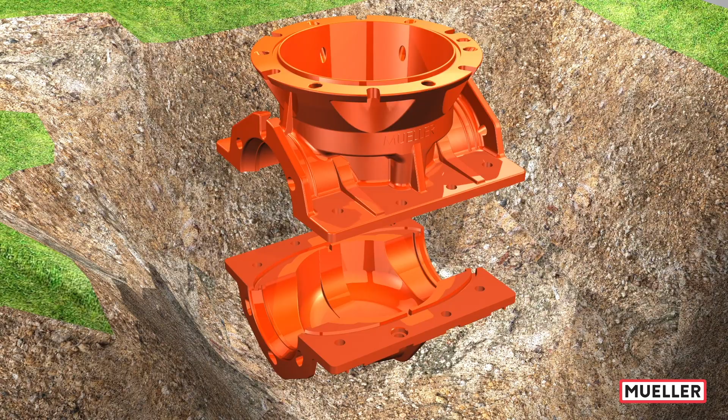Mounting the valve casing on the water main. Lower the top and bottom casings into the ditch, mount the bottom casing on the pipe, and place proper support under the bottom case.

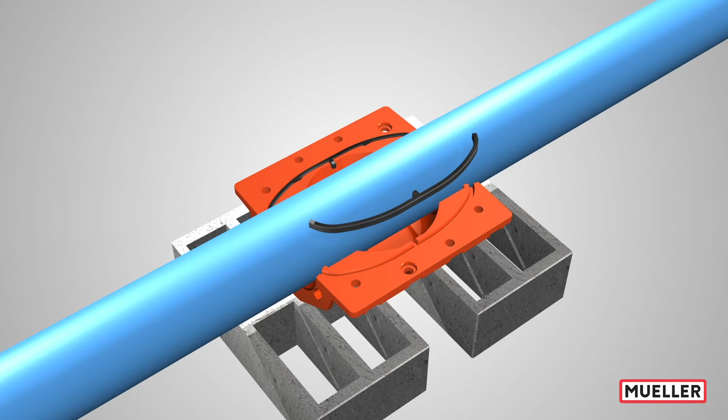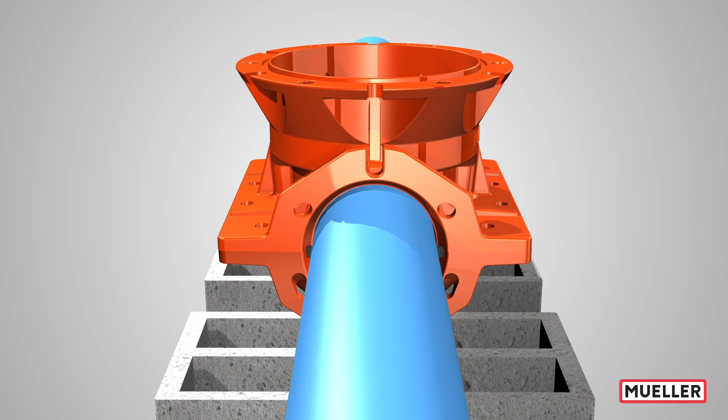Insert the side gaskets into the bottom casing. Insert the alignment bushings into the counter bores of the bottom case. Place and align the top casing onto the bottom casing, then fasten the two sleeves together.

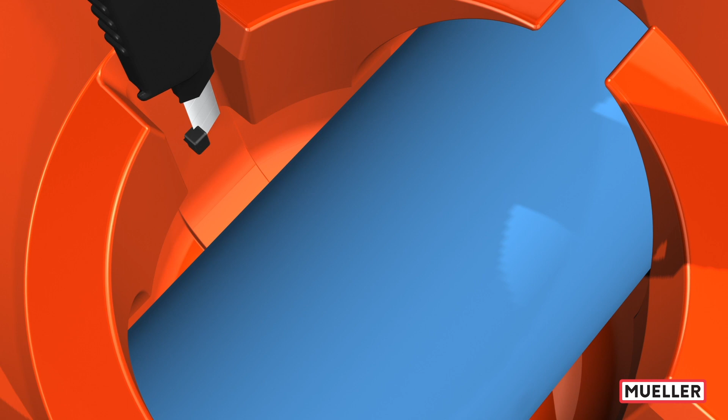Trim protruding side gasket ends at the mechanical joint and valve body sealing surfaces. Install the split mechanical joint gaskets and glands on both ends of the sleeve.

Insert the O-ring into the groove on the top casing and thread the angular bolts into the top casing until they are flush with the inside wall.

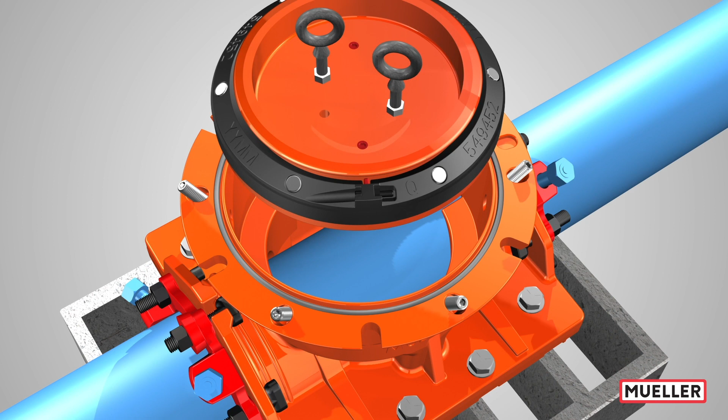Pressure testing the casing assembly. Position the pressure test plate assembly into the top casing assembly. Tighten the angular bolts into the test plate to the product's torque values.

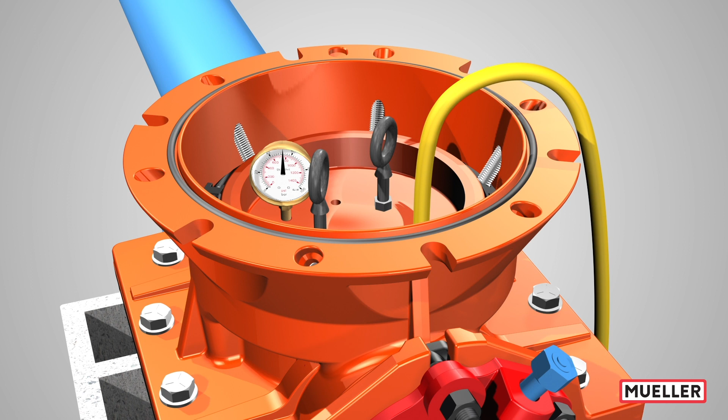Conduct a water pressure test to established pressure and time criteria using the ports provided on the test plate. The mechanical gland gripper nuts may be twisted off at this time.

Back out the angular bolts until they are flush with the inside wall. Remove the O-ring and test plate. Remove the angular bolts. Make sure that the top casing is covered to prevent debris from entering the product.

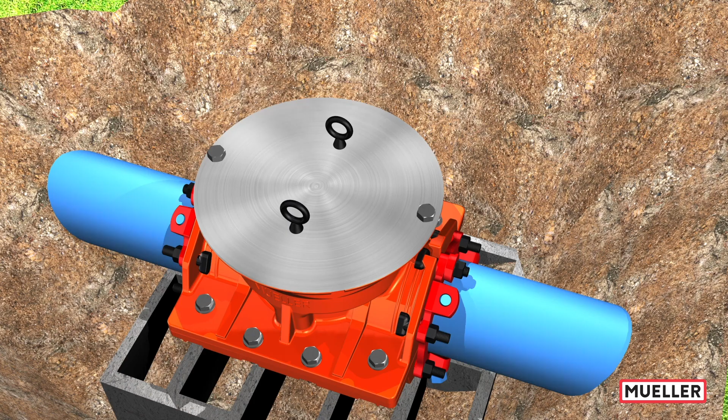Pour concrete footer up to the casing flanges.

Preparing for the cut. Thread the angular bolts into the top casing. Place O-ring into the groove of top casing.

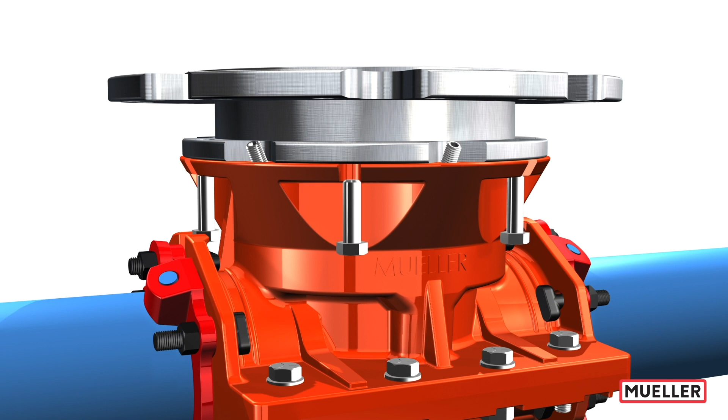Install and align the bottom adapter onto the top casing flange. Close the fasteners oriented with the nut on top of the flange.

Place the O-ring into the gland on top surface of the bottom adapter. Install the knife valve seat side up onto the bottom adapter.

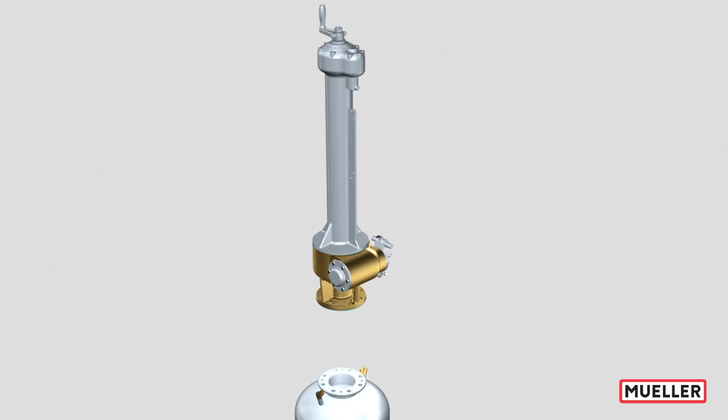Assemble the drilling machine onto the short adapter. Assemble the shell cutter and pilot drill assembly to the cutter hub.

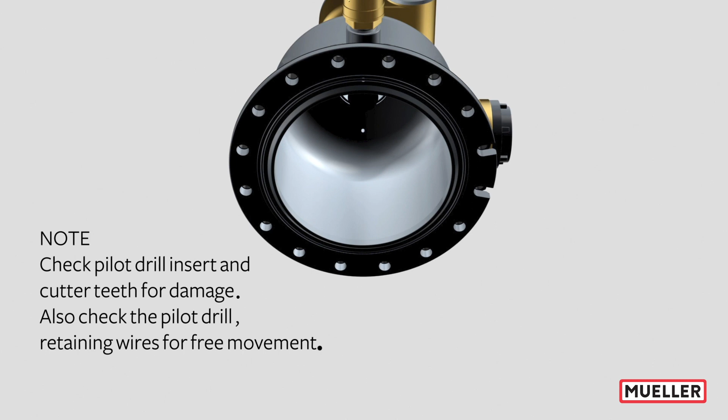Check pilot drill insert and cutter teeth for damage. Also check the pilot drill retaining wires for free movement.

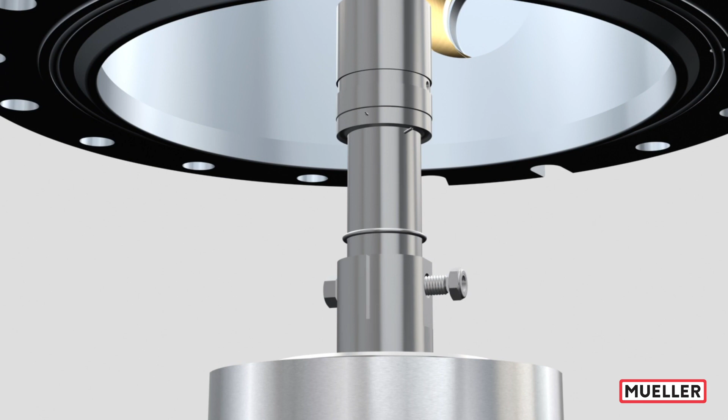Advance the boring bar to attach the cutter assembly, then retract all the way back into the short adapter.

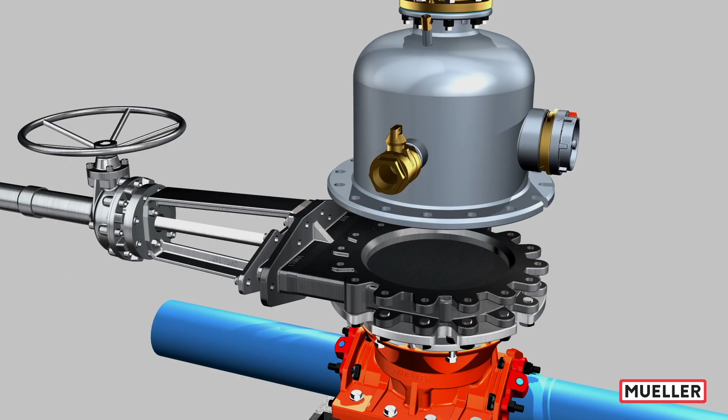Place the O-ring into the gland in the underside of the short adapter. Install the short adapter onto the knife gate.

Open the 1/4-inch air bleed valve on top of the short adapter. Fully open the knife valve.

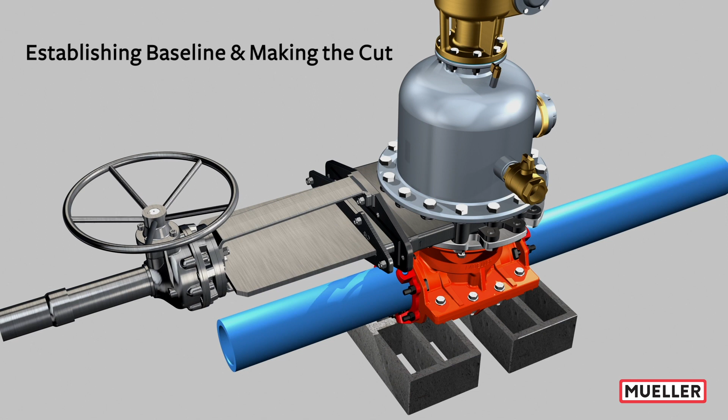Establishing baseline and making the cut. Lower the cutter until the pilot drill contacts the surface of the main.

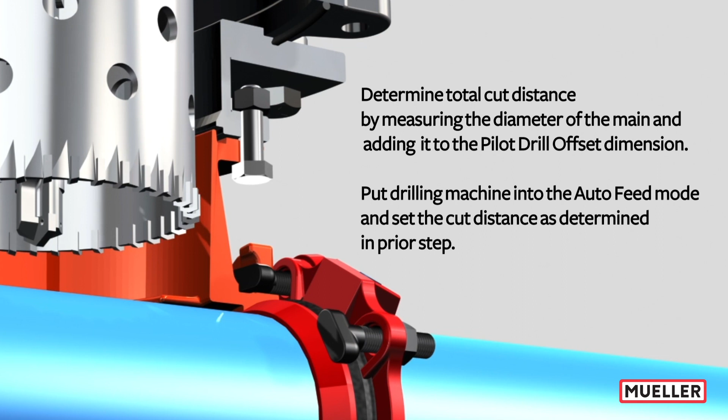Retract cutter 1 full turn of the drilling machine's manual crank rotation. Determine total cut distance by measuring the diameter of the main and adding it to the pilot drill offset dimension.

Put drilling machine into the auto feed mode and set the cut distance as determined in the prior step.

Begin the cut. Once fully vented and water escapes, close the 1/4-inch air bleed ball valve on top of the short adapter. Once the cut distance has been achieved, stop the drilling machine.

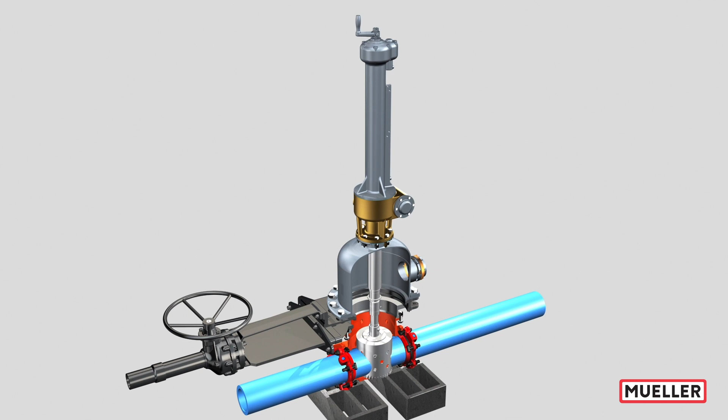Fully retract cutter into the short adapter. Close the knife valve. Open the 2-inch drain valve on the short adapter to depressurize and drain the water.

Prior to assembly, visual identification of the removed section of main pipe by the cutter assembly can be made through the 4-inch Storz inspection port.

Disassemble the short adapter drilling machine assembly from the knife valve.

Evacuating the chips. Insert the chip evacuation rod through the chip evacuation plate, then attach the retainer nut to the end of the rod.

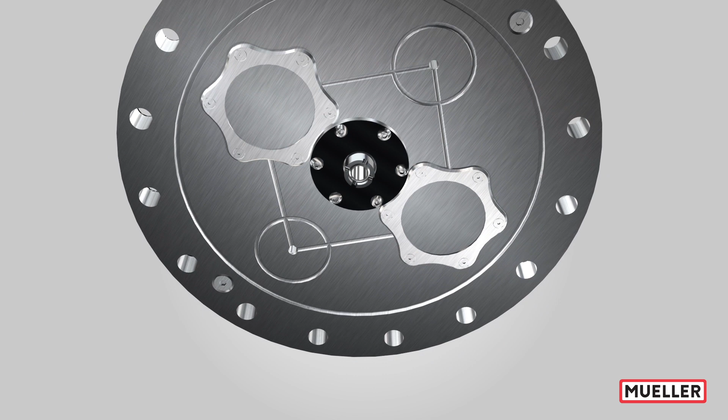Insert the O-ring in the gland of the chip evacuation plate. Attach the chip evacuation plate assembly to the knife valve.

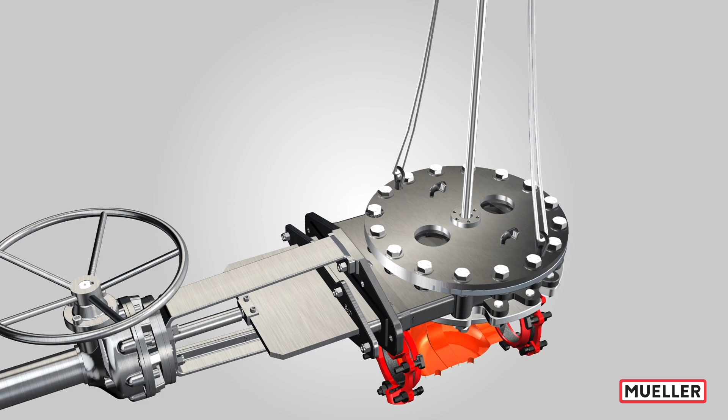Fully open the knife valve, vent the air, and push the probe to the bottom of the casing assembly. Open the release valve to begin the flushing process.

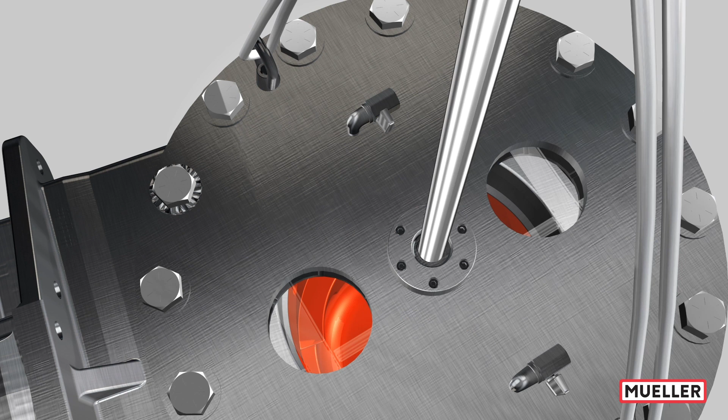In sweeping motions, move the rod across the floor of the casing assembly, flushing chips. View progress through the sight glass of chip evacuation plate. Continue until the floor of bottom casing is free of chips.

Once clean, fully retract the chip evacuation probe upward and close the knife valve. Disassemble the chip evacuation plate from the knife valve.

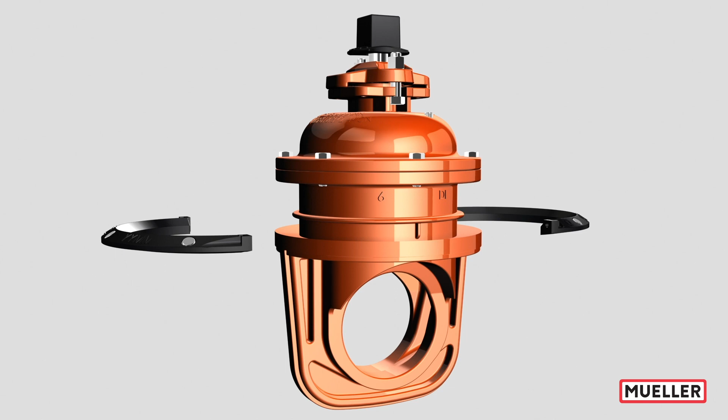Inserting valve body assembly. Assemble the valve packing ring onto the valve body and gasket. Remove the valve operating wrench nut.

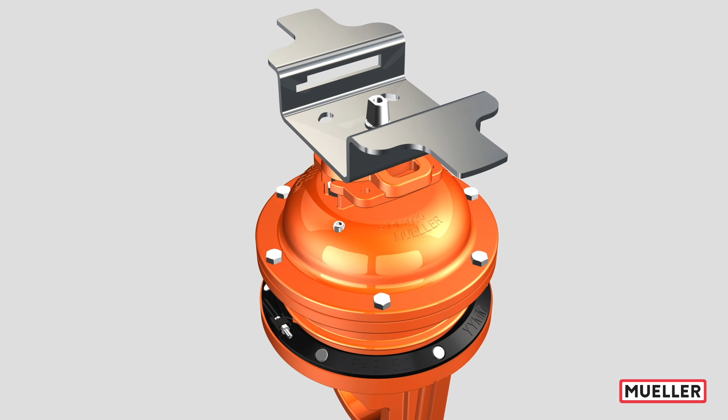Assemble the guide bracket assembly to the valve bonnet using shoulder bolts, with the valve guide perpendicular to the waterway. Stage the valve body and bracket assembly onto the long adapter.

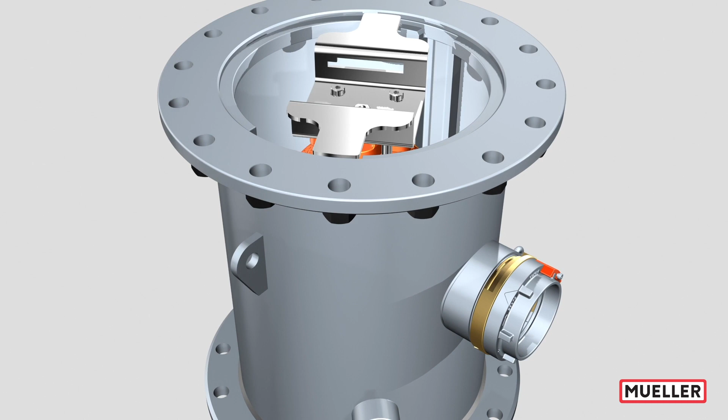Insert the O-ring in the underside gland of the long adapter. Assemble the long adapter with the valve in it to the knife valve.

Fully retract the boring bar and remove the shell cutter assembly. Attach the valve locking rod to the machine boring bar.

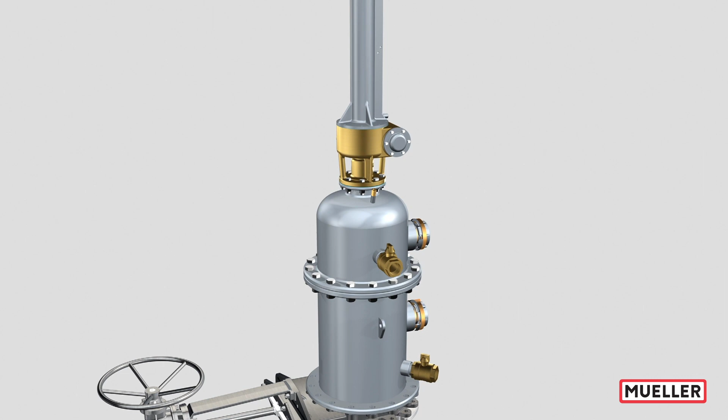Assemble the short adapter drilling machine assembly onto the long adapter. The locking rod must be centered to fit between the slots of the valve guide bracket.

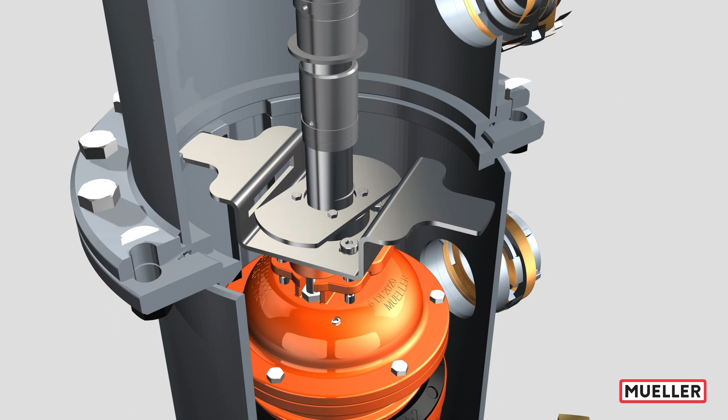Manually lower the locking rod until it touches the valve guide assembly. Rotate the locking rod by 90 degrees to engage with the valve guide assembly bracket.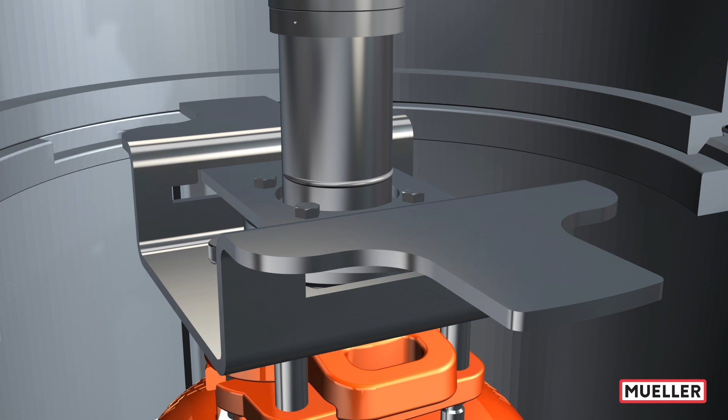Then lift the valve body assembly up off the staged position. Rotate into alignment with the valve guide tracks of long adapter.

Prior to opening the knife valve, the 4-inch Storz inspection port on the short adapter can be used for visual verification of this step being completed correctly.

Verify the 2-inch drain valves and 4-inch Storz inspection ports on both adapters are closed tight. Open the 1/4-inch air bleed valve on top of the short adapter.

Fully open the knife valve. Once fully vented, close the 1/4-inch air bleed ball valve on top of the short adapter.

Manually lower the valve body assembly until fully seated, compressing the valve body seal. Advance the angular bolts into the packing rings to the correct torque values.

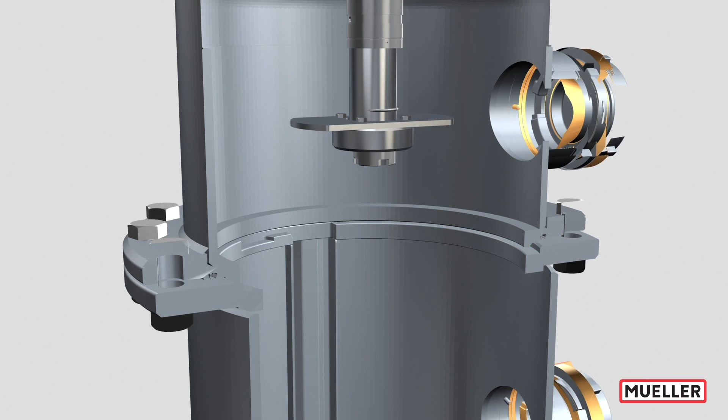Rotate locking rod by 90 degrees to disengage from the valve guide assembly bracket, then retract fully into the short adapter.

Caution: do not attempt to close the knife valve at this time. Open the 2-inch drain valves on the short and long adapters to depressurize and drain the water.

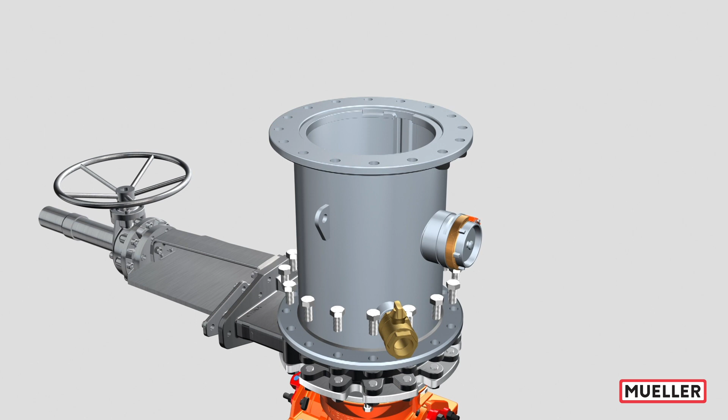After removing the bolts, disassemble and remove the short adapter, then the long adapter from the knife valve. Caution: do not remove the short and long adapter together.

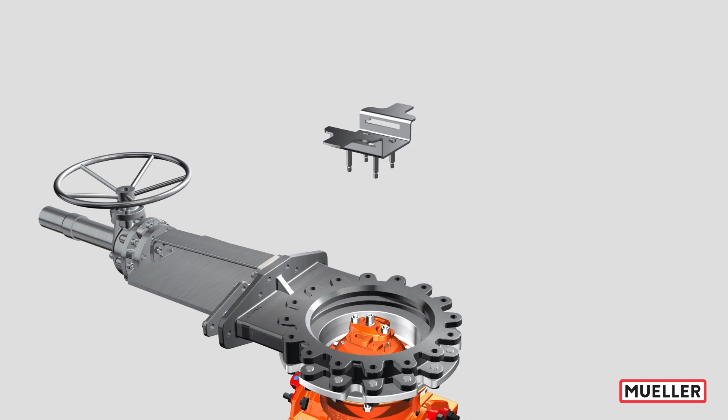Remove the valve guide bracket assembly. Remove the knife valve.

Reinstall the operating wrench nut onto the valve stem. Remove bottom adapter and O-ring.

Install the finishing gasket and plate assembly. The installation of the PermaSeal is now complete.